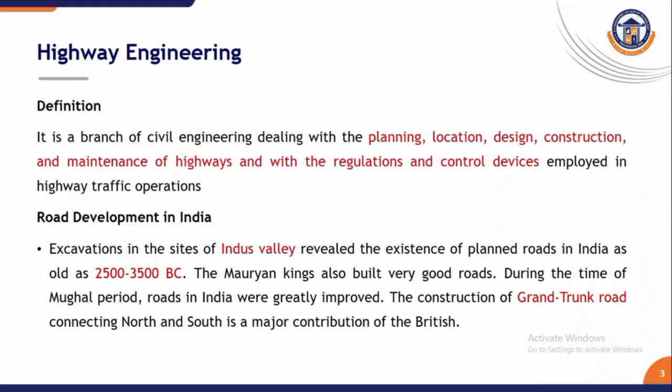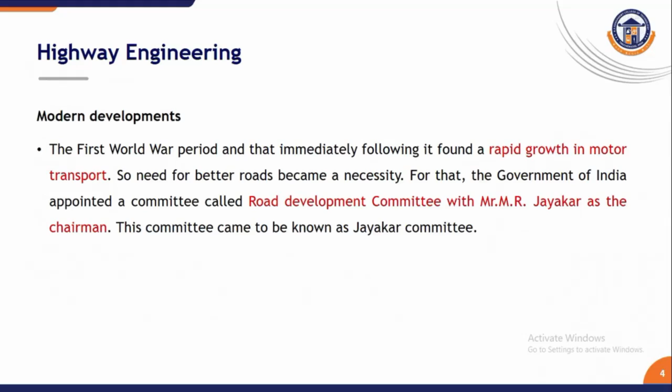Next is modern development. With the introduction of motor vehicles after World War, the need for better roads became urgent, leading to the formation of the Jayakar Committee in 1927, which recommended central coordination and funding for systematic road development across India. The Jayakar Committee proposed a 20-year road development plan and the establishment of the Indian Road Congress in 1934, which became the national body responsible for setting technical standards and guiding highway development throughout the country.

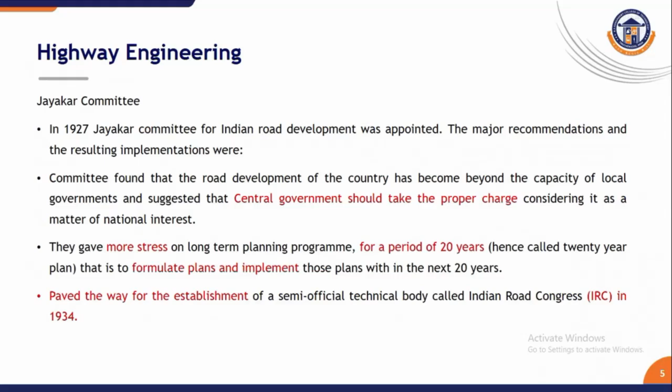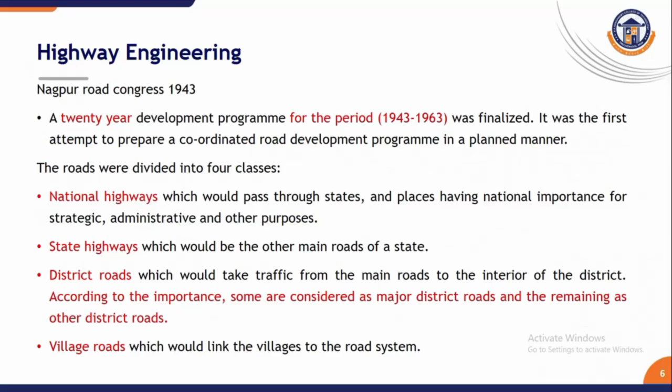In the Nagpur Road Congress in 1943, the first 20-year road plan was launched, which introduced systematic classification of roads into national, state, district and village roads, also laying the groundwork for future development.

In the Bombay Road Congress in 1961, the second 20-year road plan was initiated, emphasizing rural road development and proposing the construction of expressways, aiming for a total road length of 10 lakh kilometers and a road density of 32 kilometers per 100 square kilometers of area.

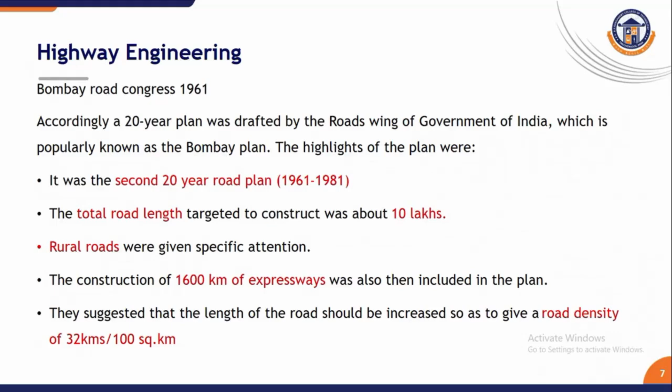In the Lucknow Road Congress in 1984, the third 20-year plan focused on improving connectivity in both rural and urban areas, aiming to increase the total road length to 12 lakh kilometers and achieve a higher road density of 82 kilometers per 100 square kilometers by the end of the planned period.

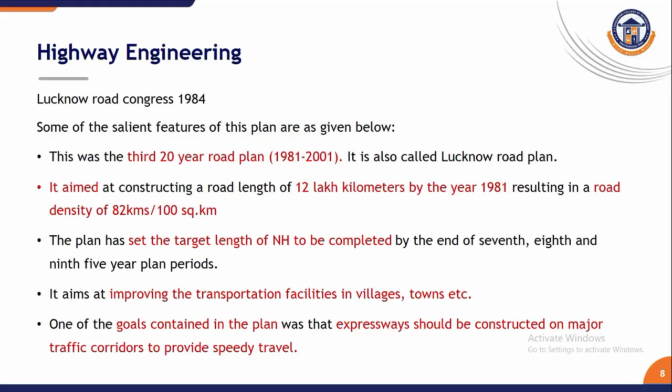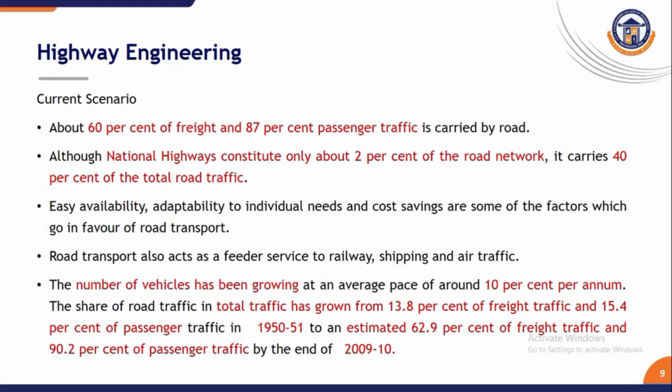In the current scenario, roads in India carry more than 60% of freight and nearly 87% of passenger traffic, with national highways making up just 2% of the total road length but bearing 40% of the total traffic volume, creating significant challenges for road planners and engineers.

In highway engineering, roads can be classified based on some criteria: based on usage, based on carriageway, based on pavement surface, and other criteria. Based on usage, whether the road can be used during different seasonal periods of the year. Based on carriageway, the types of carriageway or road pavement are classified. Based on pavement surface, the types of pavement surfacing provided are classified as surfaced or unsurfaced road.

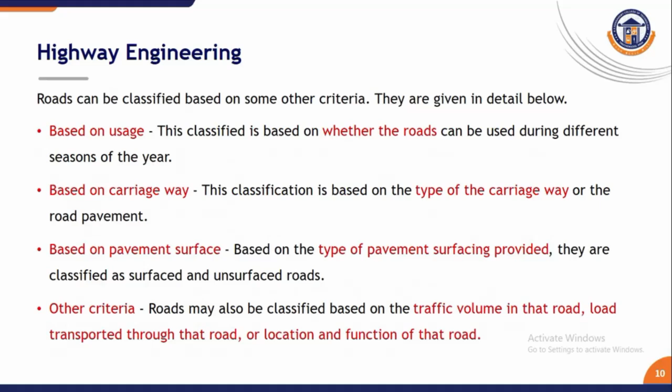In other criteria, the traffic volume on that road, load transported through that road, or location and function of the road are to be identified.

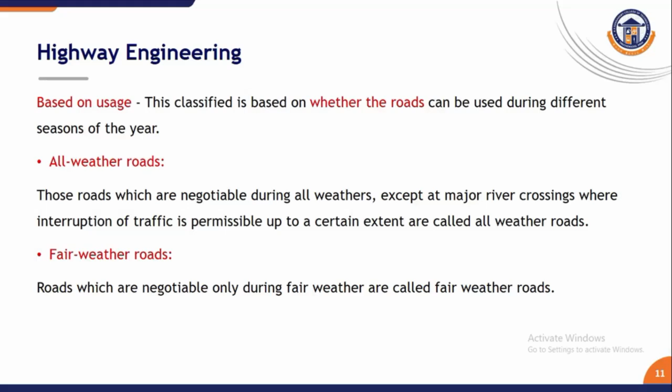Based on the surface classification, we differentiate between surfaced roads which are covered with materials like bitumen or concrete, and unsurfaced roads which are generally made of loose material like gravel or soil without any proper top layer.

Based on traffic volume, vehicle or movement, roads are classified into heavy, medium or light traffic roads, which help in selecting the appropriate design standards and structural layer requirements for construction.

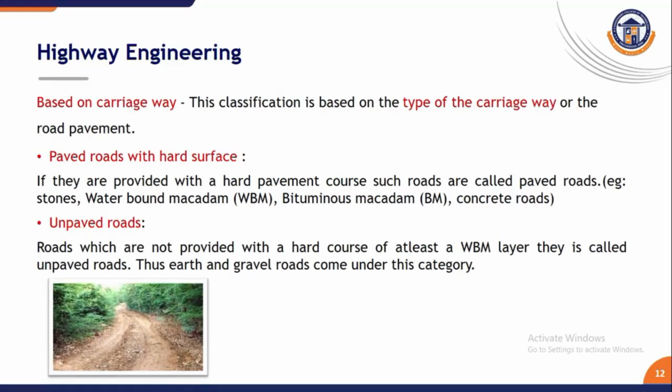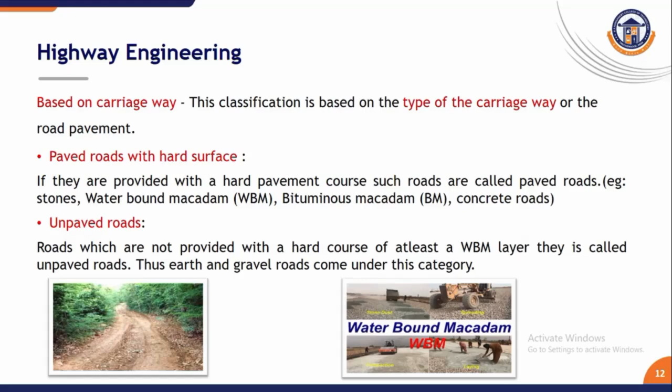Here are pictures showing pavement roads or unpavemented roads. Pavement roads such as waterbound macadam roads and unpavemented roads are shown in the figure.

Based on the surface, as already mentioned, surface road, unsurfaced road, and other criteria based on traffic volume, load transported, and location and function.

Roads can be classified based on the loads they are expected to carry and their function within the road network, such as arterial roads that handle major traffic flows, sub-arterial roads that connect arterial roads to local streets, and local roads meant for access to residential or commercial areas.

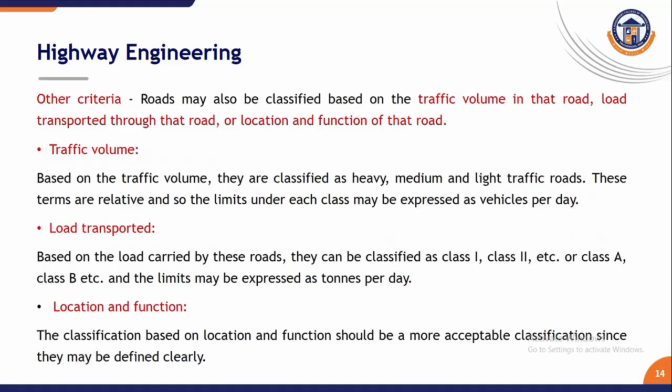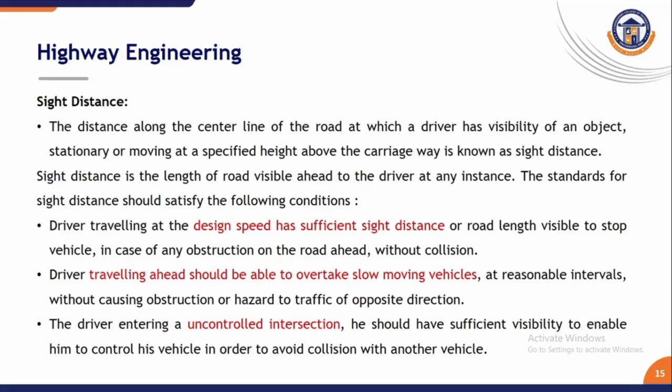The next topic is sight distance. Sight distance refers to the length of roadway ahead that is visible to the driver at any given moment, allowing them to detect and react to obstacles or traffic conditions in time to ensure safety while driving.

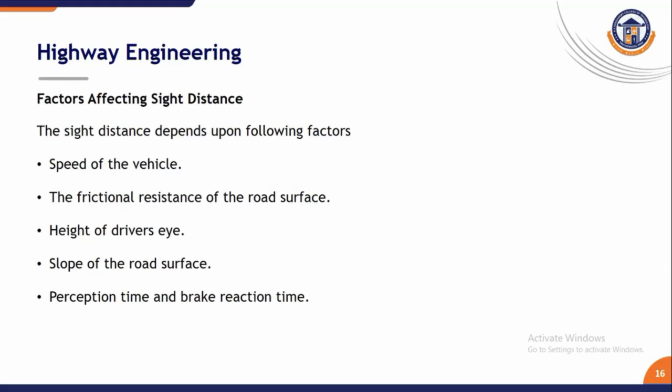These are all the factors affecting the sight distance. The major one is the speed of the vehicle, the second is the frictional resistance between the road surface and the tire, the height of the driver's eye, the slope of the road surface, and perception time and brake reaction time.

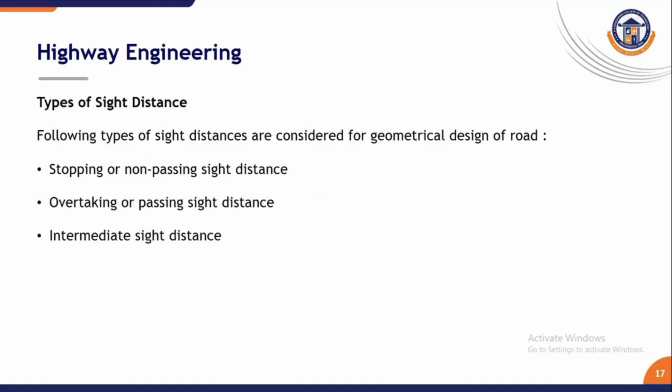Here are the types of sight distance. There are three categories: stopping or non-passing sight distance, overtaking or passing sight distance, and intermediate sight distance.

The clear distance ahead needed by a driver to bring his vehicle to a stop before meeting a stationary object on the road is called stopping or non-passing sight distance.

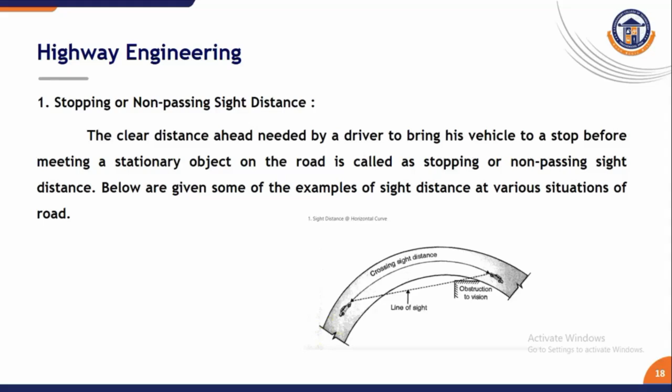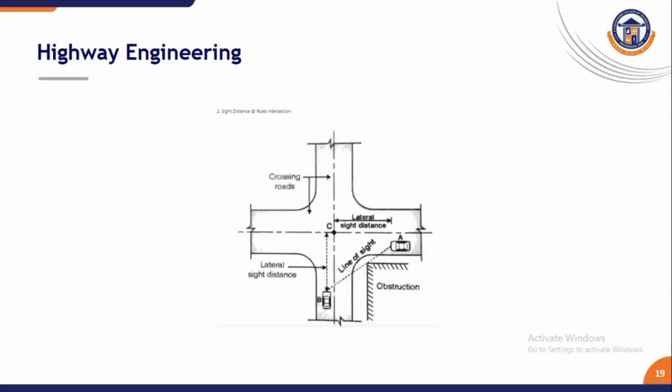Same with sight distance at a road intersection. Here two vehicles are there, but the passing way is different. Next is sight distance at a vertical summit curve.

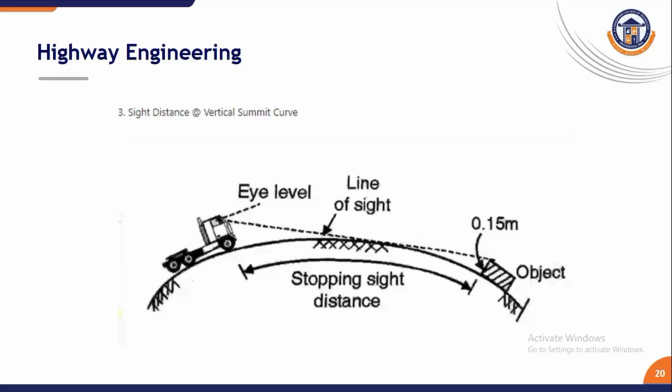This is the third category, still within stopping sight distance. Here one vehicle's left side is at eye level, and the opponent side object is 0.15 meters only. The distance between these two vehicles is the line of sight, and this is also a stopping sight distance.

The last one is the PIEV theory. PIEV stands for P is perception, I is intellection, E is emotion, and V is volition. The PIEV theory explains the psychological process a driver goes through before reacting to a situation, which includes perceiving the situation, understanding its meaning, making an emotional decision, and finally initiating the action to avoid the hazard. This typically takes about 2.5 seconds, which is mandatory.

Here are the formulas for the PIEV theory. SSD equals lag distance, that means reaction time, plus braking distance, that means after application of brakes. So the formula is SSD = vt + v squared divided by 2g(f plus or minus n/100), where v is the speed of the vehicle, t is the reaction time, f is the friction coefficient, and n is the slope. By using this formula we will solve problems in class.

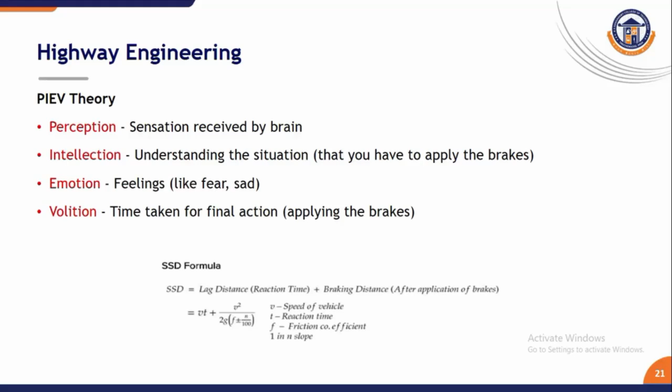The last one is overtaking sight distance. Overtaking sight distance is the minimum distance required for a vehicle to safely pass another slower moving vehicle on a two-lane road while ensuring there is no risk of collision with an oncoming vehicle, taking into account the time needed for acceleration and then returning to the lane.

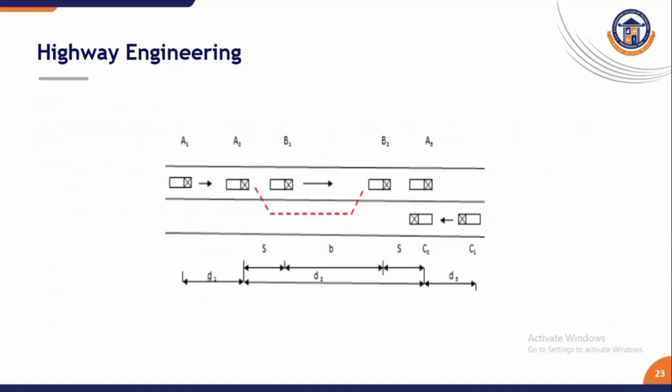Here the picture shows the same. A1, A2, A3 and B1, B2 are all vehicles in one lane passing another lane's C1, C2 vehicle. A1, A2 stand for the overtaking vehicle at its various positions during the overtaking operation.

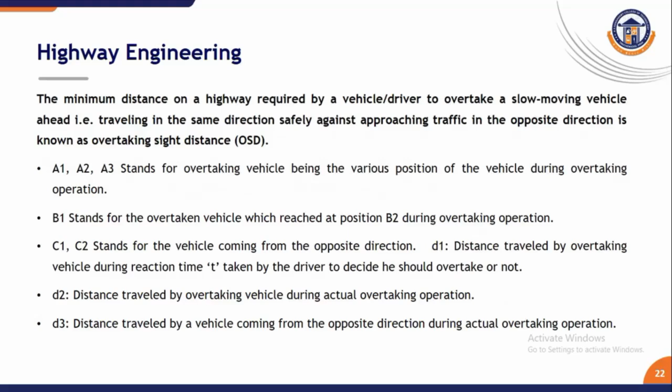B1 stands for the overtaken vehicle which reached position B2 during the overtaking operation. C1, C2 stand for the vehicle coming from the opposite direction. D1 is the distance traveled by the overtaking vehicle during the reaction time t, D2 represents the distance traveled by the overtaking vehicle during the actual overtaking operation, and D3 is the distance traveled by the vehicle coming from the opposite direction during the actual overtaking operation. This figure represents that.

Finally, intermediate sight distance. Intermediate sight distance is a safety measure used in road design when overtaking sight distance cannot be provided due to site constraints, and it is taken as twice the value of stopping sight distance to offer a reasonable buffer for safe driving conditions.

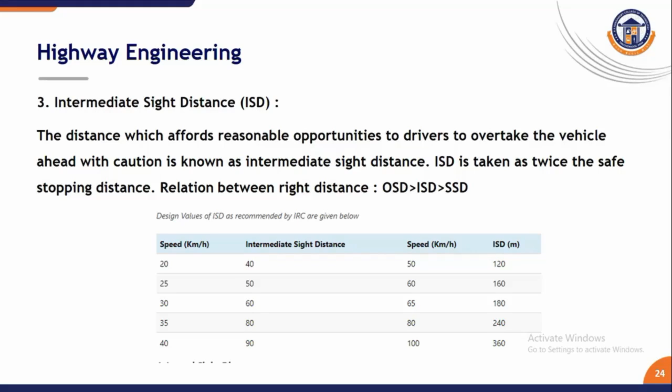In the table, the first column represents speed in kilometers per hour: 20, 25, 30, 35 and 40. The second column represents the intermediate sight distance: for 20 km/h it is 40, for 25 km/h it is 50, for 30 km/h it is 60, for 35 km/h it is 80, and for 40 km/h it is 90. Similarly, values for 50, 60, 65, 80 and 100 km/h are also given under the codal provisions by IRC, the Indian Road Congress. All intermediate distances are measured in meters.